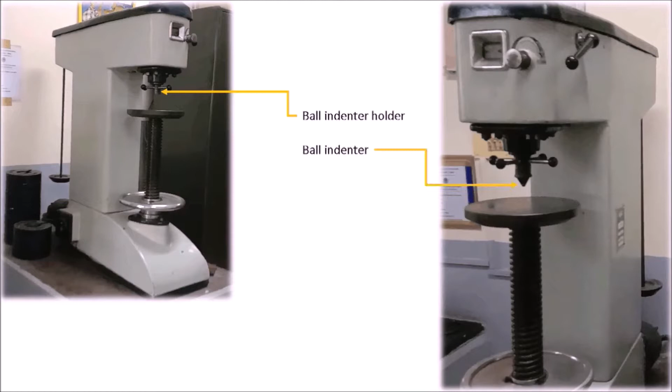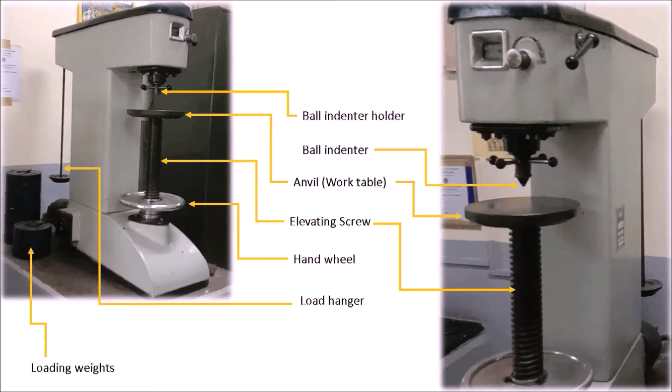Let us have a look at a typical Brinell hardness testing machine. It has a holder for the ball indenter, a ball indenter which will penetrate into the workpiece when the load is applied, an anvil or work table where the specimen is mounted during testing, an elevating screw for the vertical movement of the anvil, a hand wheel for operating the anvil, a load hanger at the back side of the machine, different loading weights, a lever for loading, a timer display and on-off switch.

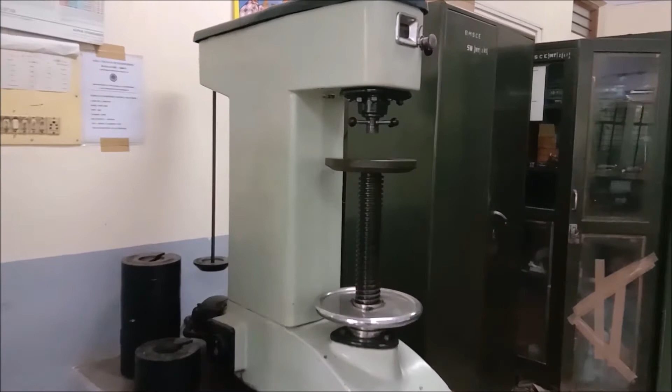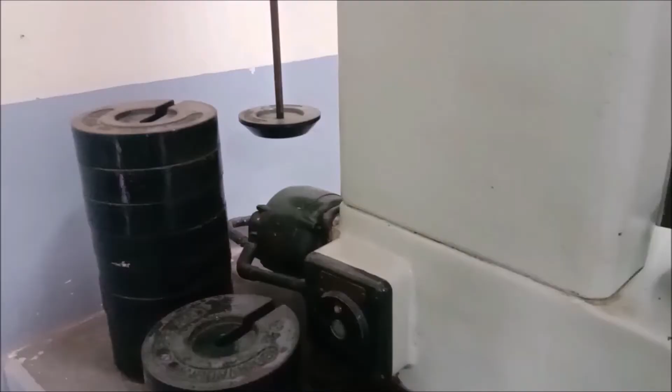Further, a traveling microscope is used for the measurement of indentation. It requires a power supply. It has an eyepiece using which indentation can be viewed and cross wires can be adjusted. It also has a micrometer for recording the reading. Now quickly have a close look at all these parts of the setup. This is the Brinell hardness testing machine. And this is the traveling microscope.

Brinell hardness test can be performed on metals such as mild steel, cast iron and so on. Let us identify the different commonly used specimen materials. This is a mild steel specimen. This is how a cast iron specimen looks like. This is an aluminium specimen. This is a copper specimen. And this is the brass specimen.

One can hear a bell sound when a mild steel specimen is dropped on the flat surface. It will be a dull sound for the cast iron specimen. Aluminium is whitish in color. Brass is yellowish or dull gold color. And copper is reddish brown in color.

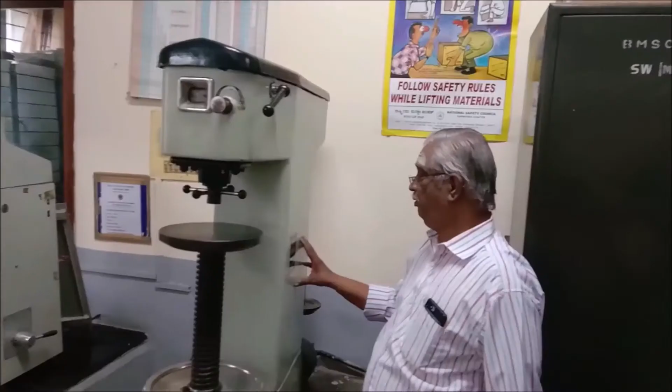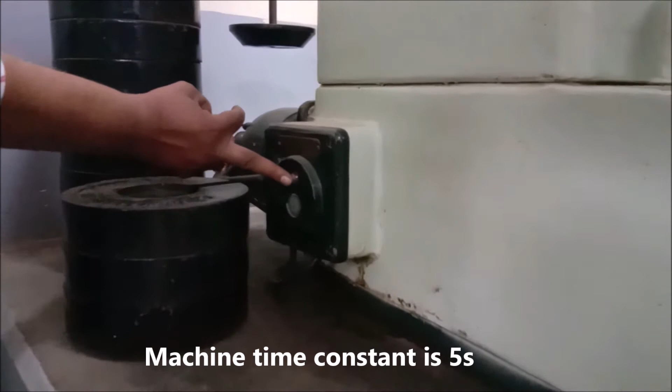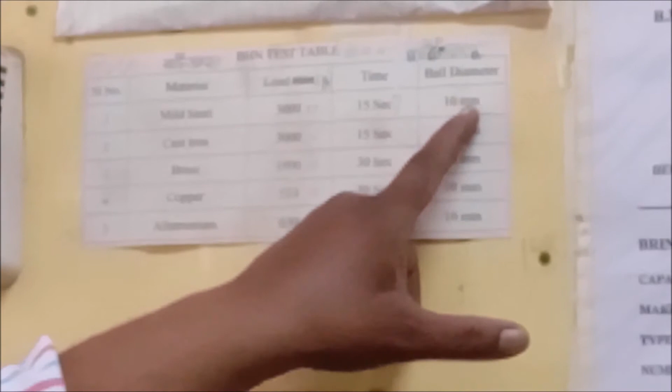This Brinell hardness testing machine has a capacity of 3000 kg. A 10 mm ball indenter is inserted into the holder. Here is the on-off switch. Grey button is on, red button is off. Manufacturer of the machine has provided standard load values, duration of application of load and the diameter of the ball indenter to be used for different specimens. You can see the details on the screen now.

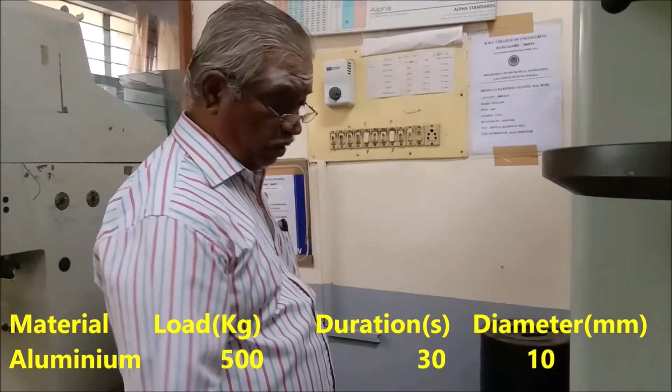Let us take aluminium specimen for this demo of the experiment, for which we have to use a load of 500 kg and for a duration of 30 seconds. Weight of the hanger itself is equivalent to 250 kg. Additional equivalent weight of 250 kg is added onto the hanger, making a total weight of 500 kg.

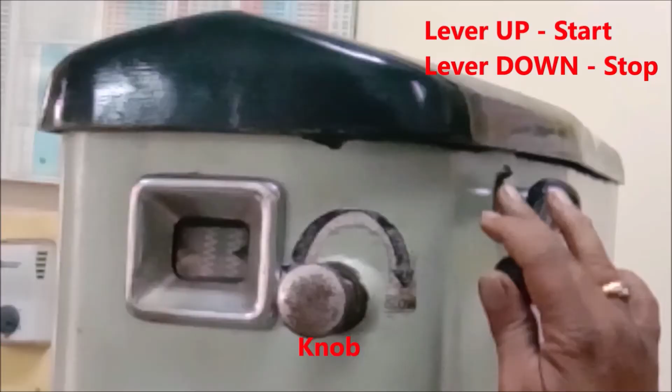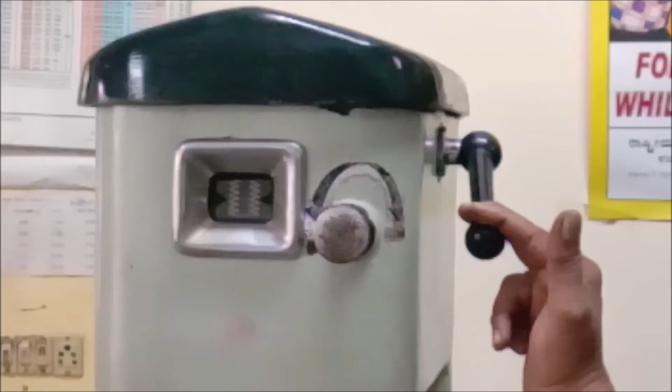By turning the knob near the timer display, you can control the movement of the display object from set to no set. Counterclockwise turning will make it faster and clockwise turning will make it slower. Now by using a stopwatch, adjust the movement from set to no set time to 5 seconds. This is an initial setting for the timer.

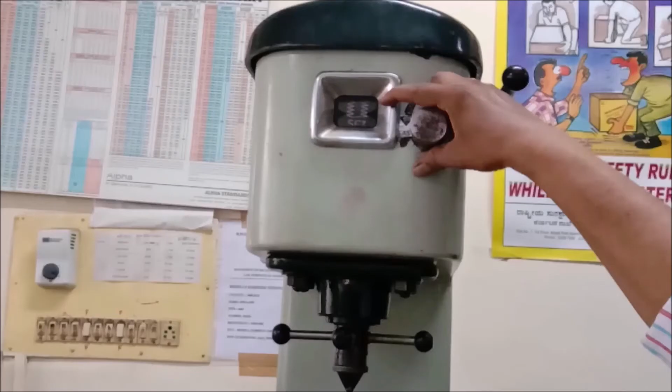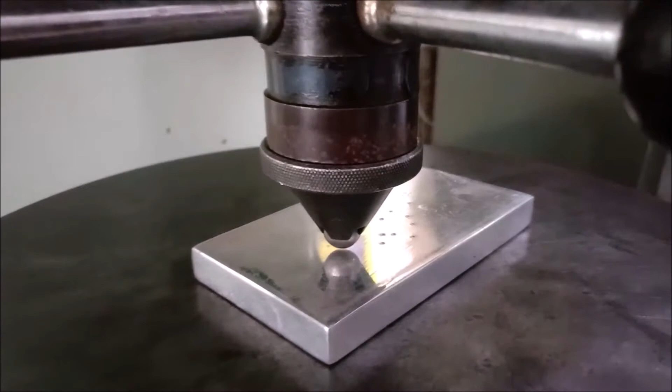Switch on the machine. Initially, make sure the set position of the timer display. Position the specimen on the anvil. Turn the hand wheel such that the work table moves vertically up until the specimen makes contact with the ball indenter. Now, you can start loading the specimen by pressing the load lever up and starting the stopwatch at the same instant.

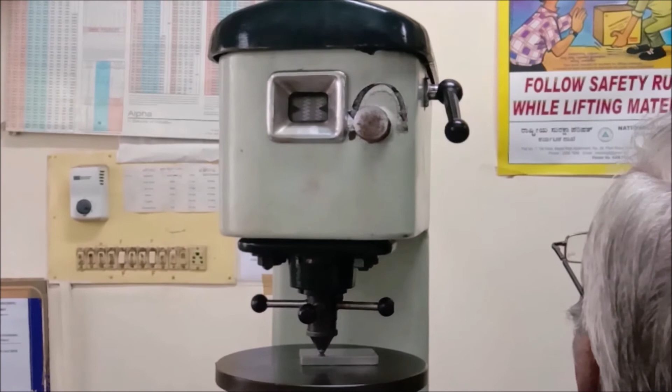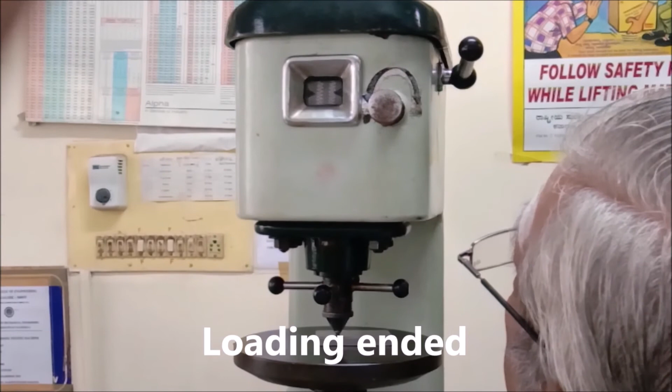After 30 seconds, unload the specimen by turning the load lever down. Now, take out the specimen, rub the surface of the specimen using a chalk so that the created indentation mark is clearly visible.

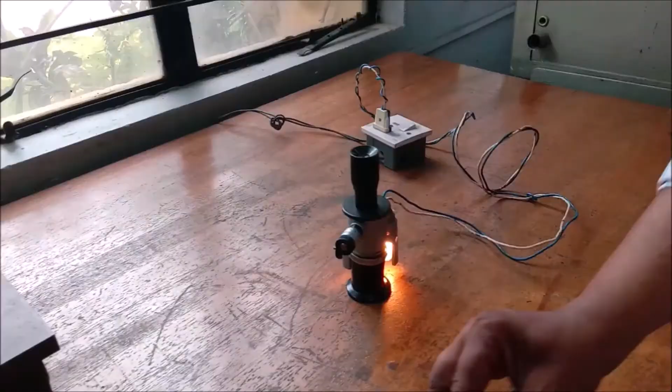Switch on the traveling microscope and position it on the specimen to view the indentation. Position of the microscope should be adjusted such that it is placed exactly at the center of the cross wires. Now measure the diameter of the indentation with the help of visible markings on the measuring scale.

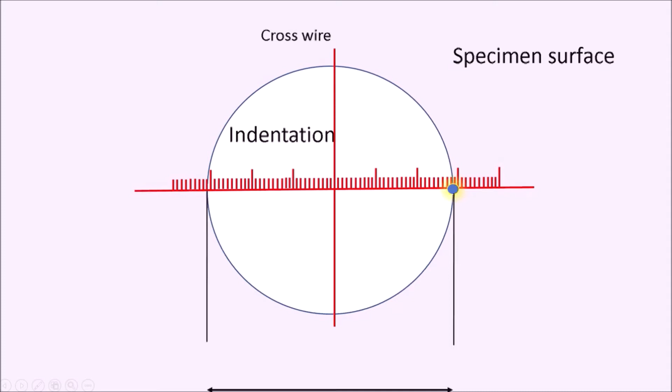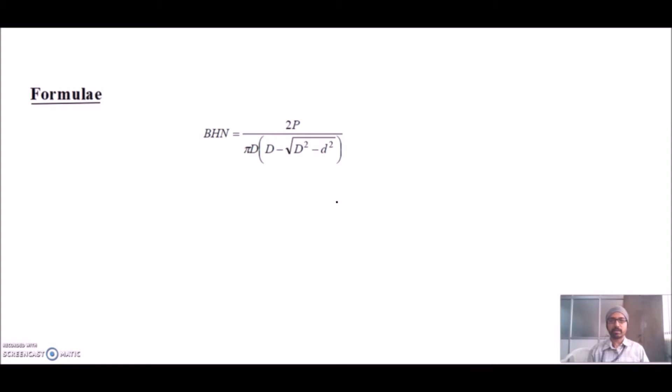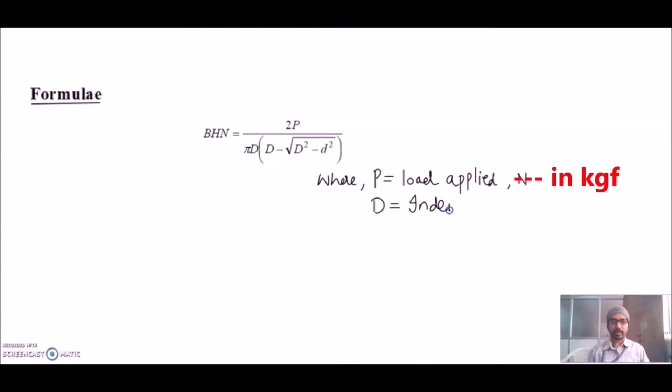The formula used to calculate Brinell hardness number is 2P divided by πD into (D minus √(D² − d²)), where P is the load applied, capital D is the indenter diameter in millimeter, small d is the indentation diameter in millimeter.

Some initial observations to be made before starting the experiment is the deadweight equivalent of the load pan, which is equivalent to 250 kgs. Similarly, each billet will weigh equivalent to 250 kgs. The machine time constant is 5 seconds and the least count of traveling microscope is 0.1 mm.

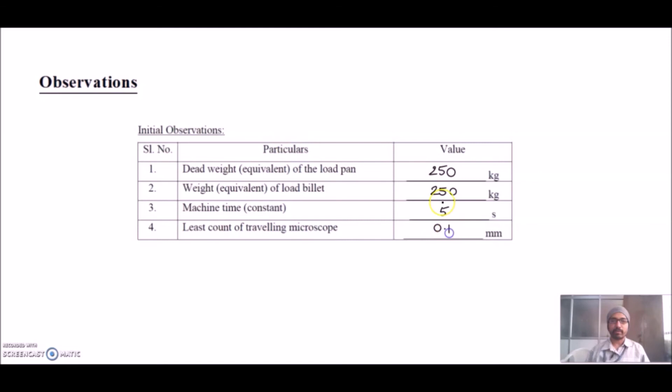The tabular column consists of these data. The first column is your specimen, next is the diameter of the indenter, then the diameter of indentation small d, applied load in kgs, then time of testing in seconds. Finally, the last column is the calculated BHN. So let us take the example of aluminium. The diameter of the indenter is 10 mm. Indentation diameter is 3.4 millimeters. The load applied is 500 kgs and the duration of application of this load is 30 seconds.

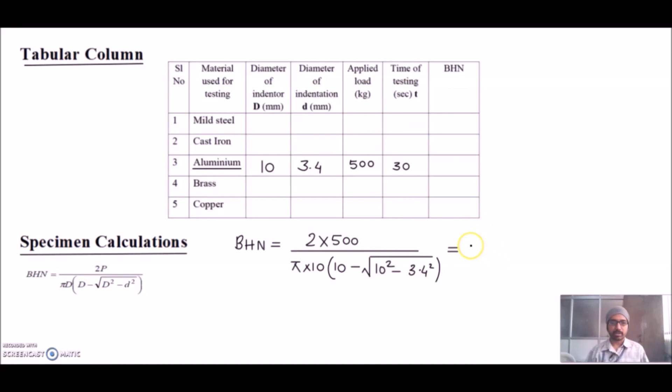Substituting the above values in this equation, we can calculate the BHN for aluminium as 2 times 500 divided by π into 10, (10 minus √(10² − 3.4²)), which gives us an approximate number of 53.4 BHN. Thank you.